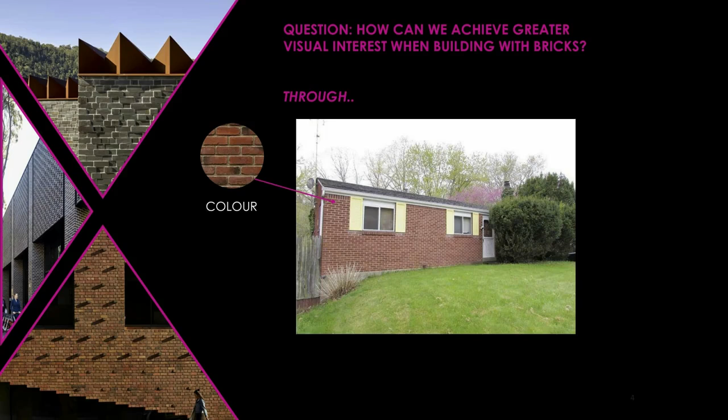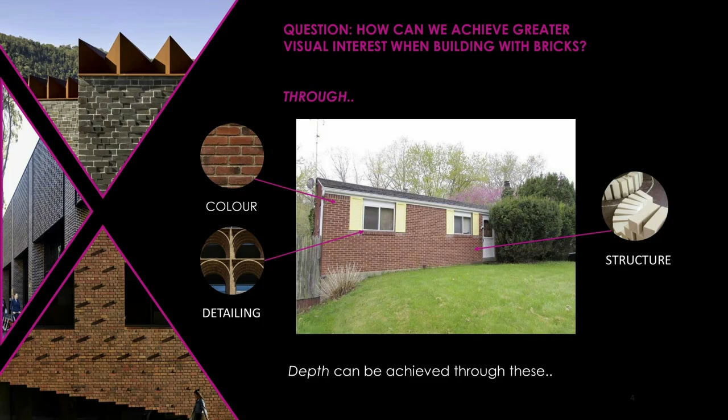The next thing we can consider is the detailing of the building itself, adding more ornamentation to the openings in an intentional way, and of course looking at the structure of the masonry system itself. All these factors combined can actually achieve great depth, and with that we get these great and excellent results, as you can see here.

Bricks aren't necessarily the first material most architects would reach for. The treatment of these designs can actually create projects that are both delicate as well as substantial too. The first thing we'll be talking about here is the use of brick colors. Brick colors are a very simple way to create and pull off different looks that create actual depth and different textures.

And lastly, of course, we have the Hale Junior School underneath. So we can see that brick colors in general, the individual units, can be used as both a statement piece, but they can also be used in conjunction, blending them and also contrasting them too.

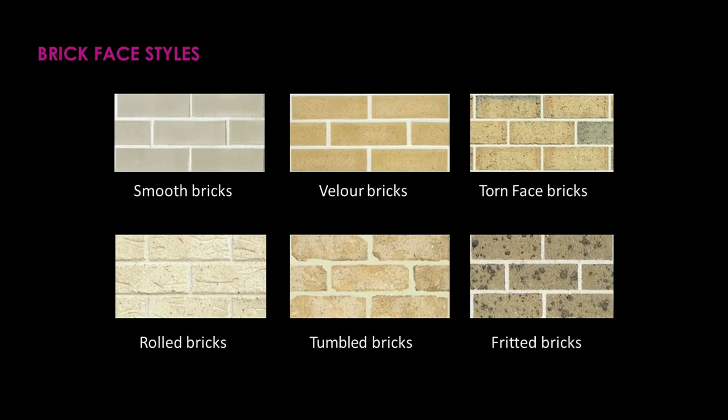And of course, with the mortar joint, not only is color a consideration for bricks and mortar, but you can actually have different sorts of joints as well, as you're probably most aware of. There's also a practicality aspect to it, in terms of a raked brick being a little bit more difficult for waterproofing systems in general, but it actually is a great look in terms of making the brick look a bit more inset into the masonry walling system itself. And the ironed sort of joints as well, they're really great for kind of rainwater runoff.

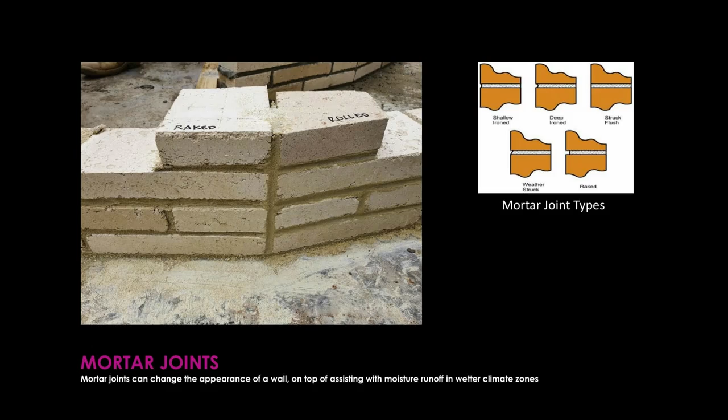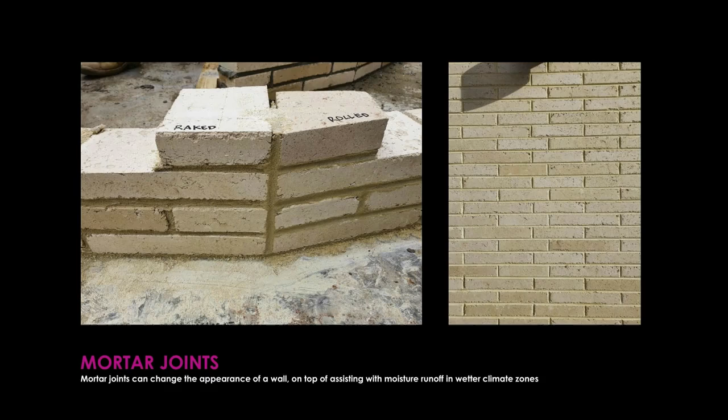And this is kind of the achieved effect. This is actually the Tate by Cera Stribley, which we'll be talking about more. As you can see here, it actually creates such a really lovely effect with the little shadows as well that you can only really see up close. That also helps to kind of create more interaction and dialogue with the people surrounding.

And so this is also another effect here. We can see that this is another prototype by the West End project, which is the Turner Studios. You can really see the difference between the raked versus rolled joint. I like to think of this as a great example in terms of, you can see the raked how that sort of inlaid inset effect creates a little bit more depth, whereas the ironed joint actually creates a bit more of a seamless sort of one unit piece.

And so now we'll be delving into achieving texture with these case studies. We have Tate House by Cera Stribley, Tiger Prawn by WOWOWA, West End by Turner Studio, and Hello House by Wolf Architecture. All of these projects are really great examples of contemporary Australian architecture that is really elevated by brick use, and actually really demonstrates the amount of creativity and the potential that can be done with masonry units.

Okay, so beginning with Tate by Cera Stribley. Tate is actually located in Melbourne and is actually a series of 8 family dwellings. These are actually reminiscent of traditional townhouses in their vertical massing, but I actually think they kind of subvert this traditional idea of townhouses as well, because they're quite modern in their facade design. As well as that, they use stereotypical uses of brick in townhouses, but it's also subverted by the fact that it looks like one cohesive unit, with the dimensions of the doors and windows actually sunken into the building itself.

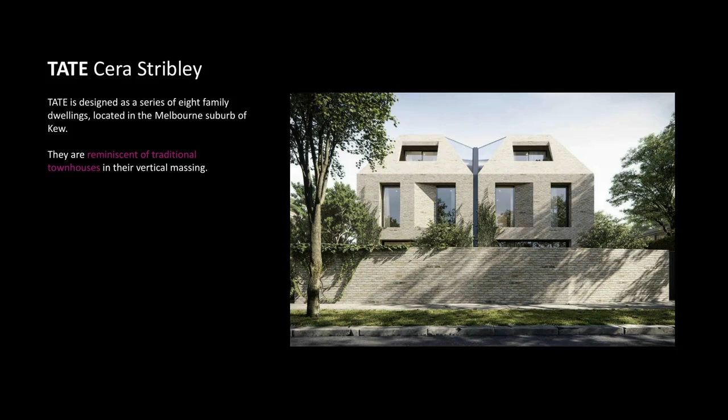I think this is particularly emphasised by Tate itself. They chose a very nice, subtle mortar colour that blends in with the bricks, helping to create that cohesive single piece of facade.

And the cavity walls, structurally speaking, there were special wall ties implemented for this project to accommodate the wide cavity walls. Also looking at the different detailing of the building, the soffits and the lintels - these soffits help provide a seamless transition between the windows and external walls, and the lintels additionally help to frame the doors and articulate the specific spaces on the facade design itself.

I actually thought the roof design was a particularly interesting point about Tate. You don't see a lot of bricks incorporated into the roof itself, but these are actually brick faces, and it was a really great way of transitioning between the wall and the roof with the main facade. It's not something that's often really seen.

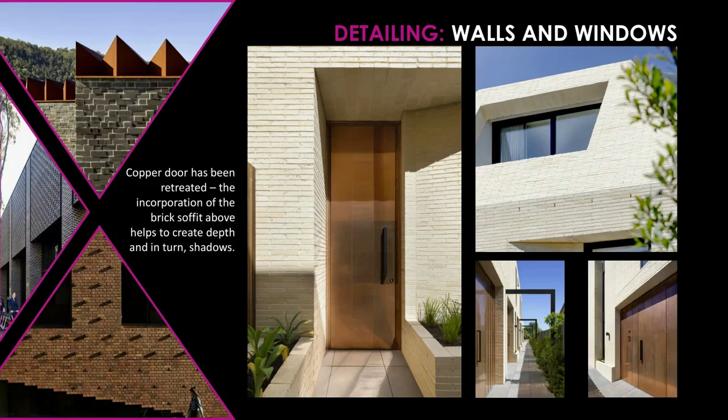Also looking at the practical side of building with masonry, and how that can be integrated into the facade itself - you can actually see here it's quite a subtle look, not necessarily something you'd notice at first glance if you're looking at the Tate buildings.

We have those little weep holes, which I'm sure everyone has an idea of in terms of the practical application of being able to drain moisture from the cavity and preventing water from entering the interior of the house itself.

And of course we have these control joints, which help articulate the brickwork, and you can see they're actually in line with the windows. I haven't highlighted them on the slide, but you can see them on the right side. It just goes to show how well the mortar and brick units have been constructed and designed so that it's such a seamless appearance.

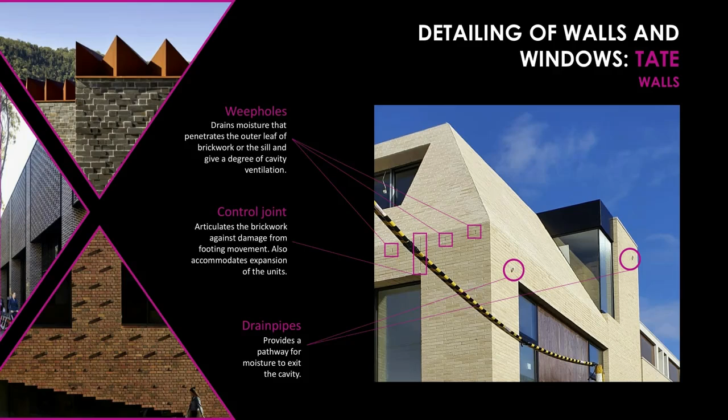And lastly, of course, we have these drain pipes, which are a great way of incorporating a pathway for moisture to exit the cavity. We'll touch a little more on that when we look at the roof as well, at the gutters.

Just a little brief overview in terms of what soffits and lintels are, in case anyone's a little confused about the difference. The soffit in general is the section under the overhang of the structure, and it's a frame edge support.

Lintels, on the other hand, are mainly above windows, so they help provide strength and support to the masonry courses above, since those bricks are quite dense and heavy. Brick lintels are a feature that can assist in creating these seamless textures.

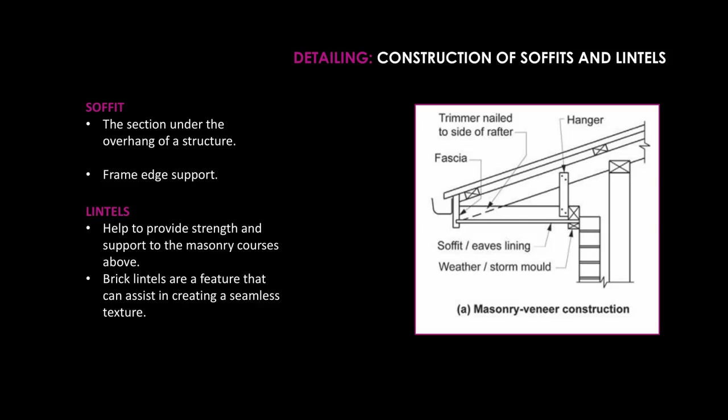The Tate is a great example of this. We can see a little bit of the behind-the-scenes construction work of the Tate itself, with the structural considerations. From these pictures, you can see the steel rafters have been placed under timber joists, which are for the structure of the floor.

Going into the mechanism and design considerations behind the structural support of the building itself for lintels and soffits: unreinforced masonry over openings, in terms of the bearings, should be supported by these lintels or these frames.

The lintel bearings, on either side that touch the brick courses underneath, should be a minimum of 100 millimeters for an opening less than 1,000 millimeters wide, or 150 millimeters for openings over 1,000 millimeters wide. Just a few things here in terms of the detailing.

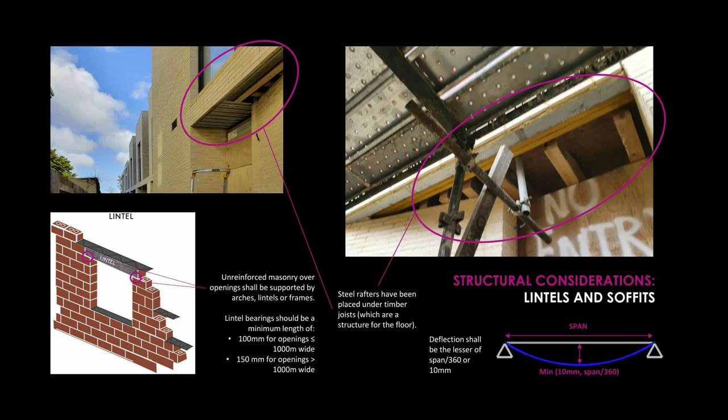Deflection should be the lesser of the span over 360, or 10 millimeters. And then we also have that minimum of 10 millimeters as well.

We also have a closer look at the construction of the soffits. You can really see here the steel, which I was talking about before, and the timber joists, and how they work in conjunction.

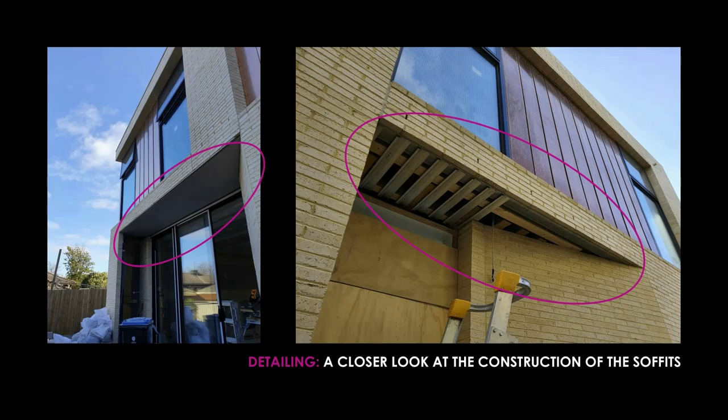We're not too sure exactly how the bricks were adhered to the steel itself, but we speculate that it could either be tied to it, or adhered to it with some sort of glue or mortar.

I'll pass it over to Jack if he wants to speak a little bit about this.

As Callista mentioned before, if we're talking about soffits and how we have inlaid soffits with bricks visible from below - you can see here, and similarly with the Tate project, that both of these projects have openings and soffits where they've chosen to expose the bricks from below, which is something we don't see too often, and can be a little difficult to achieve.

As Callista mentioned, the traditional way of detailing a soffit or an opening is to use that lintel, whether steel or concrete, which makes it easy to lay your masonry courses over the top of it. What the architects have done with the Holme apartments project, which you can see on screen here,

is they've worked closely with the engineers, and closely with Ancon Leviat, one of Think Brick Australia's associate members and regional members. If you look at the photo in the top left, they've developed a shelf angle system as their lintel system to support the brickwork over these soffits.

Essentially, the next course of bricks for the next floor sits on this shelf angle. Below that, they've employed a bespoke soffit support system. If you look at that top middle image, I think it's a fantastic image as an engineer, showing some creative solutions from an engineering standpoint.

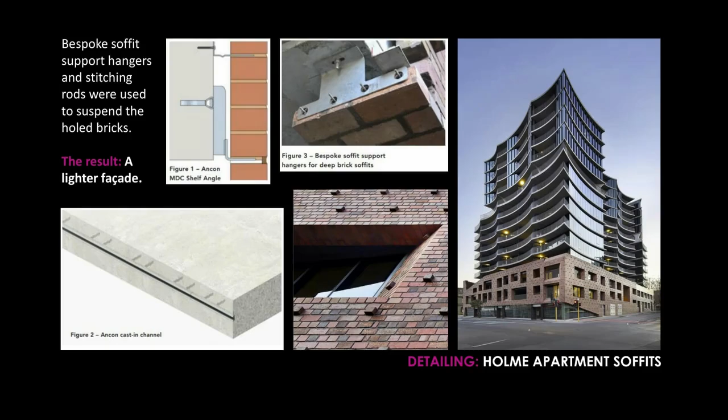So look, I'm going to move on to the detailing of the roof for the Tate project now that we've talked a little about the soffits. You can actually see here how the roof has come together, and some of the techniques the architects and builders employed to get it done.

The roof was constructed of a stud wall frame, and what they've done is use brick slips, or brick faces, on those stud walls to give the appearance of a full brick roof without the added weight. This serves as a non-load bearing component. You can see here an example in the bottom left of a brick face walling system, and this is the type of thing that was applied to Tate's roof.

If you're looking to do a similar system, I know some of our members here at Think Brick Australia do have their own brick face systems and brick slip systems, and they're really increasing in popularity. So if you're looking for something similar, I'd strongly encourage you to reach out to some of our members here at Think Brick Australia and see what solutions they might have for your project.

Callista also mentioned before, when we were talking about detailing and weatherproofing, that it's incredibly important with masonry to ensure it's detailed and weatherproofed properly. If you've been to any of our webinars before and heard me present, my number one analogy is that bricks are like sponges. Over time, they do absorb water very slowly. But this means we need a mechanism to divert that water and ensure it doesn't impact the structure of our builds.

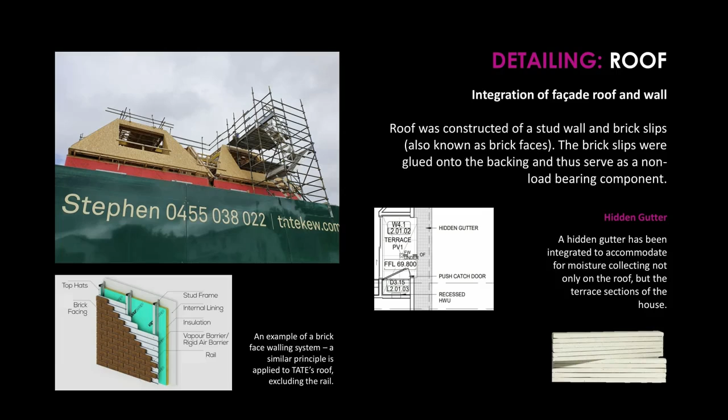If you look at a photo of this completed project, you can't actually see the gutters at all, and that was on purpose — detailed within the build. The architects wanted this to look quite monolithic, with the roof and walls blending seamlessly. So as an architect or building designer, if you want to achieve that monolithic feel, it's about thinking outside the box: how can I do my weatherproofing of a masonry walling system but still get that seamless look? You can see here that the architects at Sarah Stribley, along with the builders and engineers, all worked really closely to achieve that successful result.

So look, now I want to talk a little about curved walls, and bringing detail, texture, and depth to our builds using textured walls.

So you can see here the first image on the left. This is a project called Tiger Prawn by WOWOWA Architecture - bonus points if you can pronounce that really quickly ten times in a row. In between that, we have the Smart Design Studio in Sydney, winner of our Think Brick Awards commercial category last year. Adjacent to that is Phoenix Central Park, a project by Durbach Block Jaggers and John Wardle Architects. All three projects have used bricks from our Think Brick members, and you can see they've used them in very different ways to achieve very different looks - looks you might not associate with bricks. That's something to think about as I go through these next slides.

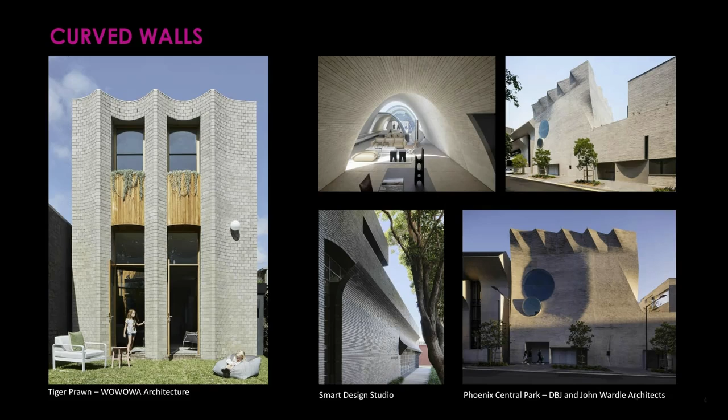So firstly, let's look at Tiger Prawn. The first thing you'll notice about this project is its name - a very striking name, and there's a reason for that if you look at the actual structure and shape of the build. It might resemble a tiger prawn caught in the wild. It would have been very easy to use an alternate lightweight metal or curved steel sheeting facade to achieve this look, but the architects really wanted to focus on using bricks and clay masonry to create these intricate curved shapes. They wanted to use curved lintels and curved bricks to help diffuse light into the build - you can see that particularly with the interior image, how the light is coming into those rooms.

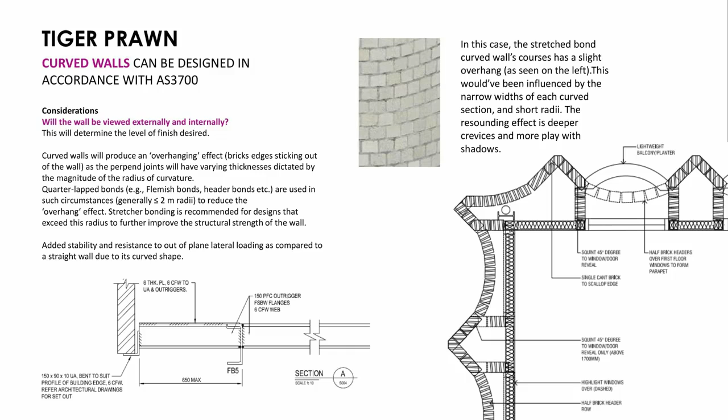These next couple photos show a great example of how they've used different shaped bricks, which Callista mentioned earlier, to create dynamic features. Looking at the image on the left, not every brick is directly rectilinear. They've used squint bricks, essentially a regular square brick with one corner chopped off, which allowed them to create that arrow point shape with relative ease and avoided the need for cutting bricks on site.

So if you're a designer thinking about how to achieve tight shapes and curved, non-linear sections, bricks are a great way to do this because manufacturers provide bricks in different shapes and can cut them for you and deliver them in the shapes you want. This saves time and adds to the efficiency of your build when you get to the job site.

Now looking at the image at the top right, you can see another thing they've done. They split the bricks in half and altered the orientation in which they laid them, which allowed them to essentially halve the use of bricks for the build. Depending on which side of your curved wall you want exposed, you can detail your bricks quite differently.

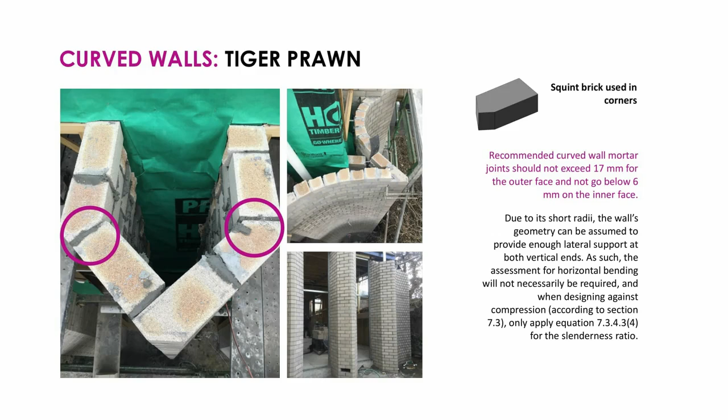Looking at West End by Turner Studio, you can see these fantastic, monolithic arches they've employed in the project. The first thing you might notice, apart from the arches, is that everything is quite seamless. They've made an effort to expose and celebrate the brick in as many locations as possible, which is on theme with Tiger Prawn and the other projects we've discussed today — celebrating how we can use bricks in ways we might not have thought possible before.

So when it comes to arches, we need to be thinking about ensuring they have sufficient rise to carry the loads and be able to transfer those loads from the top of the arch transversely outward into the brickwork.

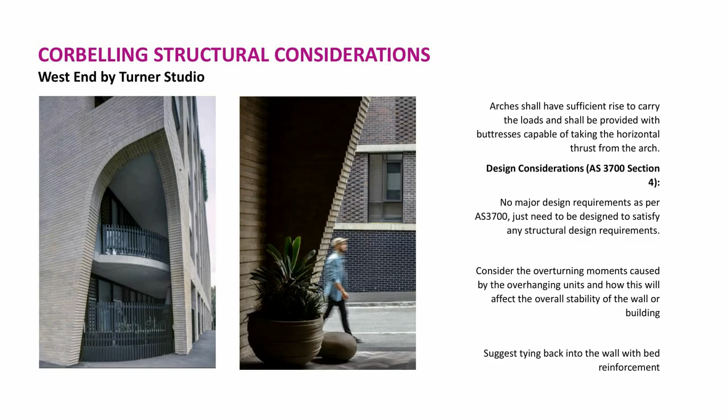What you'll see in the next photo are the clever solutions that the engineers, architects, and builders worked together to employ on site to get these arches to work.

You can see they've got this in-plane corbelling for this arch. What I mean is these bricks basically staircase upwards in the direction of the brick wall, with every single course protruding further and further out. We've tied that back to an asymmetrical arch, and that steel frame does our load bearing for us, supporting that brickwork and that corbel so it doesn't eventually fall under its own weight.

You can see with some of these other pictures on the right-hand side, they've replicated that asymmetrical arch design, not just with those sandstone or sandy colored bricks, but with the dark colored bricks that Callista mentioned before. So no matter what design, color, or articulation you're looking for, you can combine architectural design with engineering principles to bring about something that's a little bit different and really stands out.

As I mentioned before, the architects made a great effort to celebrate and expose bricks with every single element of the build. They've had to use steel structural elements to hide a lot of the structure, then overlaid the bricks on top of that to give the appearance of a flush masonry design. It's incredibly clever.

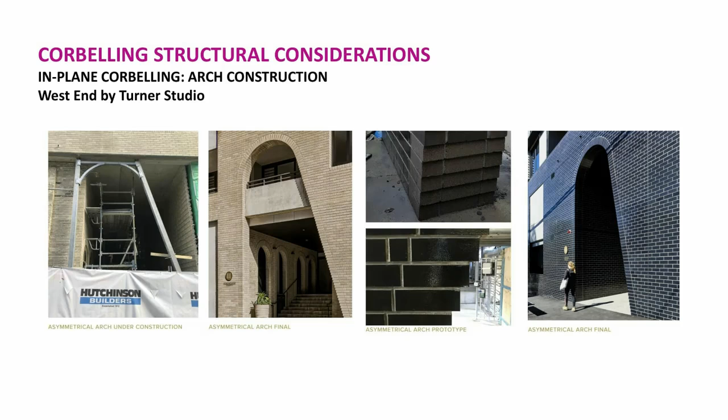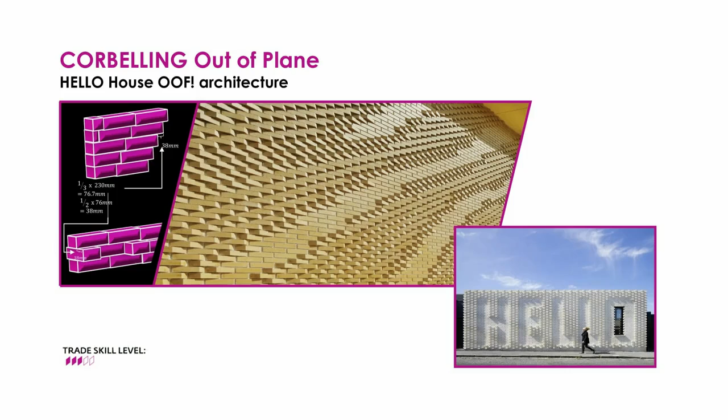AS 3700 does set some guidelines for how we might do this. But again, we can work closely as a team between builders, engineers, and designers to celebrate our corbel and add that texture to our brickwork.

I'm going to talk a little bit about Hello House by Oof Architecture, which was in our Think Brick Awards a few years ago. Just a little teaser image there in the bottom right, you can see they've used some beautiful Chillingham white bricks to accentuate an image, or pixel art as I've thought about it before. They've used corbelling to achieve that effect, and done it in a very clever manner.

Let's quickly start with how and what our restrictions are with corbelling out of plane. This slide has information taken straight from our Australian standard, but what you really need to take out of this is probably that bottom dot point: the projection of any single brick shall not exceed one-third of the unit dimension measured in the direction of the corbel.

So one-third of 110 millimeters for a standard brick would be 36 millimeters, or half the height of the unit, which for a traditional 230, 110, 76 brick, would be 38 millimeters. We take the lesser of those, and if I want you to take anything out of this slide, it's that the maximum protrusion per course for a corbel would generally be about 35 to 38 millimeters, or 36 using those rules. But again, we can work closely to adjust that as necessary depending on the design we're going for.

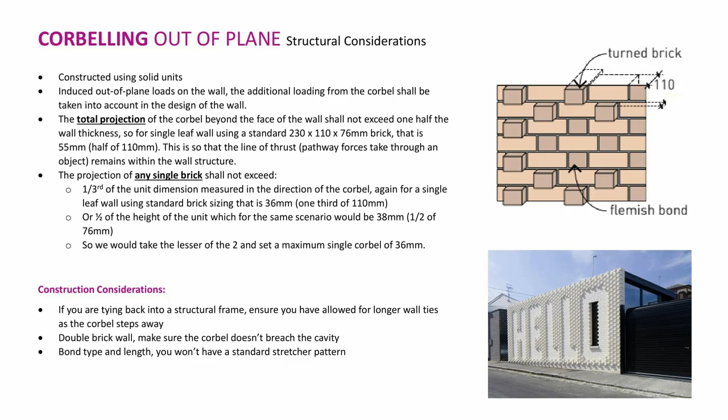So you can see here with the Hello House, we've got an image of the project, and also a detailed image of how they've achieved it from a top-down or plan view.

The first thing I'd like to draw your attention to from a corbelling perspective is that to achieve their pattern, they've realistically thought about the brick as a pixel, or one singular unit that they've manipulated. I come from the generation that grew up with video games, so I liken a lot of brick projects like this to Minecraft and singular block units. If we think of bricks as a modular unit we can manipulate to create different patterns, it opens up a lot of possibilities for how we might corbel and protrude our bricks.

What the architects at OOF Architecture did here is use the negative space for their corbel, essentially the bricks laid flush in that regular stretcher or Flemish bond, to form the pattern of their brickwork. And the corbel itself, the pattern where the bricks protrude outwards, basically bolds those letters to make it more obvious from street level.

As Callista mentioned before, we can realistically use colour to create a pattern like this, and we can do so a little easier with coloured bricks. But it's nice to do something a bit different and articulate our masonry a little differently, and that's exactly what the architects have done here.

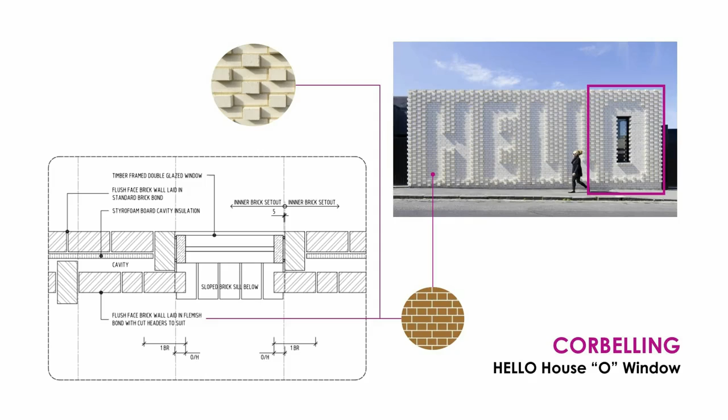I'm sure everyone here, particularly if you're from the East Coast and have been getting a lot of that wet weather over the past few months, knows that water on the inside of your house is generally bad news and not something you want. So when we're doing corbelling and protruding bricks, we need to ensure we don't neglect the rules of weatherproofing our masonry, and that it's still articulated properly.

And you can see here, just accentuating that point a bit further, the end detail for how they've actually achieved that.

You can see here they've stepped back their window one course exactly from the actual corner of their corbel. What that's allowed them to do is, again, looking at modular and sustainable design, avoid having to cut bricks to achieve this look.

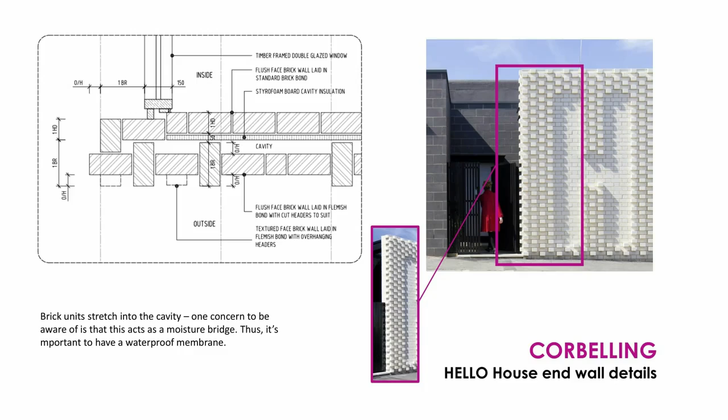So if you're looking to use bricks to create a textured effect, I'd highly encourage you to think about how you can manipulate your brick units, or alternatively, how you can select different shapes of brick units to avoid having to cut things on site and increase the efficiency of your build.